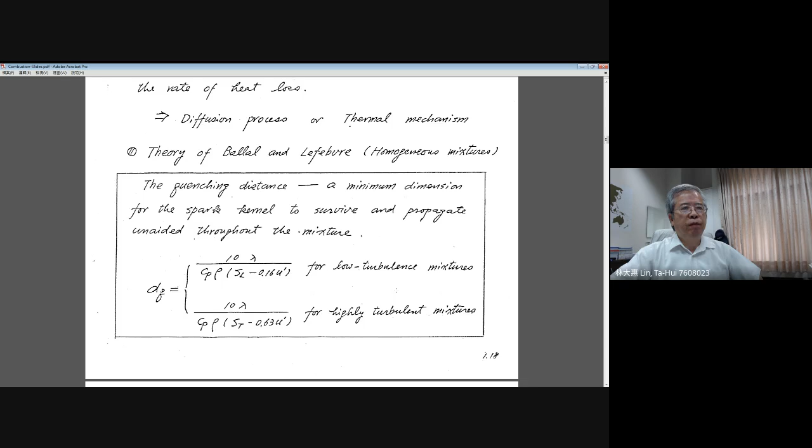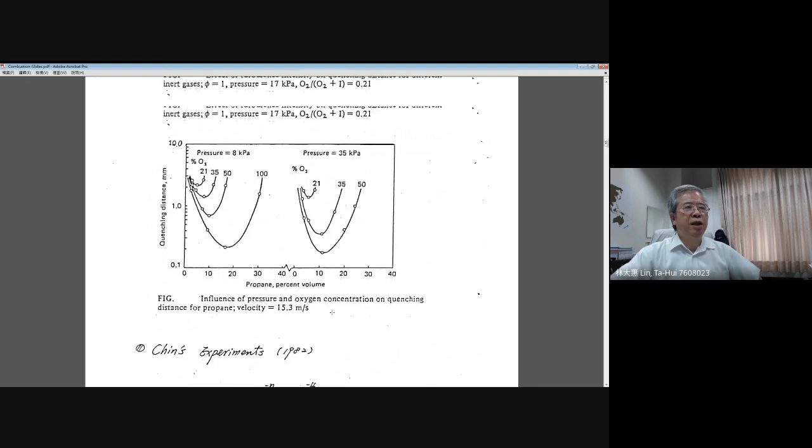Now I will give you some experimental results to emphasize the dependence of thermal diffusivity and turbulent intensity on the quenching distance for low turbulent and highly turbulent mixtures. This data came from the Chin experiment in 1982. The first figure shows quenching distance as a function of turbulent intensity on the horizontal axis, and also how it changes with different inert mixtures.

Let me explain a little. Here they give two sets of experiments, one for methane fuel and one for propane fuel on the right-hand side. Normally methane or propane mix well with air, and inside air, nitrogen is the inert. When you do the experiment with methane mixing with air, you can see the quenching distance increases with increasing turbulent intensity, for both methane and propane.

This is quite easy to understand following the previous formula. When you have larger turbulent intensity, the turbulent eddies carry a certain amount of thermal energy away from the control volume you want to ignite. With larger turbulent intensity, the quenching distance increases, meaning you need a larger fireball for successful ignition.

Next, we change the inert from nitrogen to carbon dioxide. Nitrogen and carbon dioxide have almost the same thermal conductivity, but carbon dioxide has a smaller specific heat. Nitrogen has a larger specific heat.

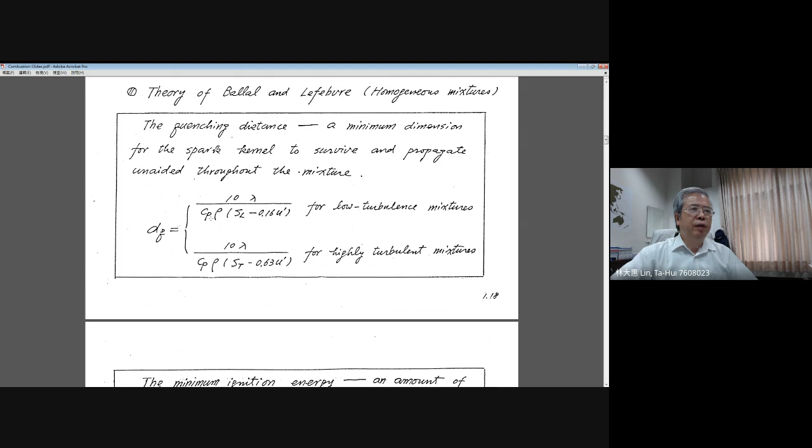Going back to the formula, specific heat exists in the denominator. When you have a smaller value, as carbon dioxide has, the quenching distance will increase, become larger. So you can see the line for carbon dioxide as inert is higher than the line for nitrogen, for both cases.

This is the first part I want to emphasize: comparing carbon dioxide and nitrogen, they have the same thermal conductivity, but nitrogen has a larger specific heat, which makes the thermal diffusivity smaller. So the quenching distance will be smaller compared with carbon dioxide as an inert.

Now, next we consider changing the inert to helium and argon, which show different variations in thermal diffusivity. Let's compare these two cases, helium and argon. Both are simple atomic gases.

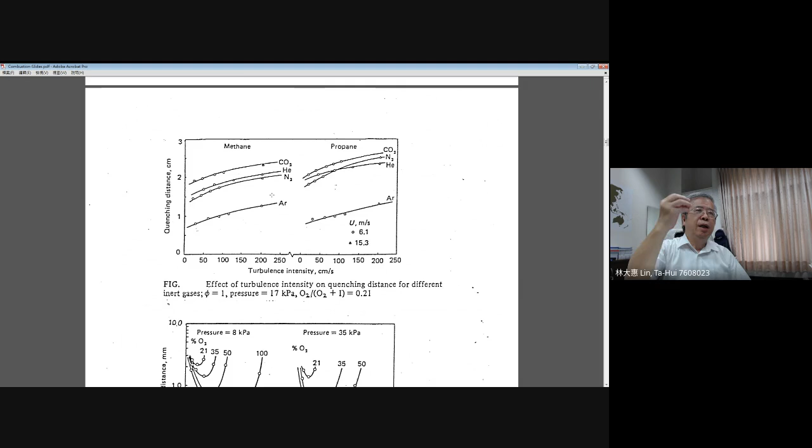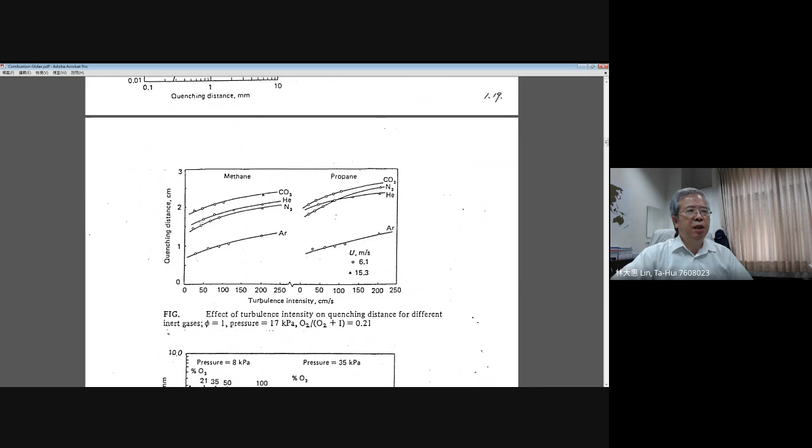They have almost the same specific heat, but the thermal conductivity for helium, because it has a small molecular weight, is larger than the thermal conductivity of argon, meaning they have higher thermal diffusivity. Lambda, the thermal conductivity, occurs in the numerator in the previous formula, as you see in this curve. So a larger thermal conductivity means you will have a larger quenching distance, and you can see the quenching distance for helium is higher than that for argon, for both cases.

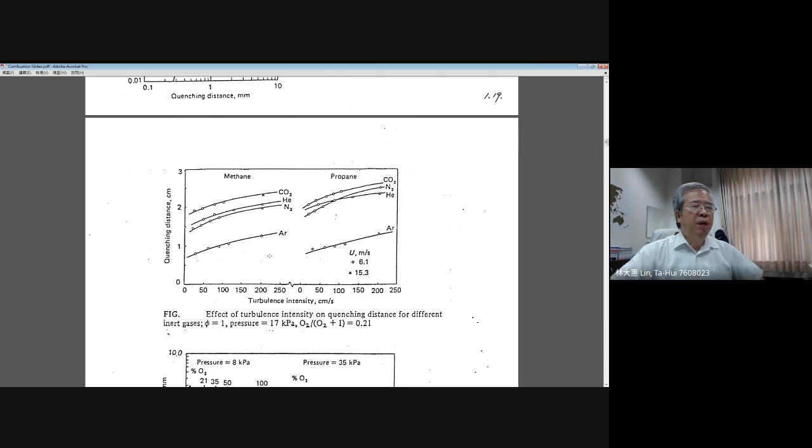Okay, and this experimental result gives you the idea about the inference coming from the thermal diffusivity and also the turbulent intensity as described by the formula for the minima dimension of spark kernel, or what we call the quenching distance.

The next figures tell you some inference coming from the mixing ratio and also the pressure. The left-hand side shows us the low pressure, 8 kPa conditions. Every curve for a different concentration of oxygen shows a U-shaped curve.

Let's look at the pure oxygen case. It shows a higher value for both sides, a higher quenching distance for the left-hand side and right-hand side. You can figure out the mixing ratio change based on the horizontal axis.

They tell you the propane percent, this is a concentration percent. For 100% oxygen, near the bottom of this shape, the mixture condition is very close to stoichiometric. In this region, they correspond very nicely, well mixed, with enough fuel and enough oxygen, easier to be ignited.

Now the quenching distance reaches a minimum value, but if you increase or decrease the percent of propane, you go through the so-called rich side or lean side. Rich side means you have extra fuel, and lean side means you have extra oxygen. For both cases, they do not have the optimal mixing condition, so the minimal ignition energy or quenching distance will be increased. This is easy to understand.

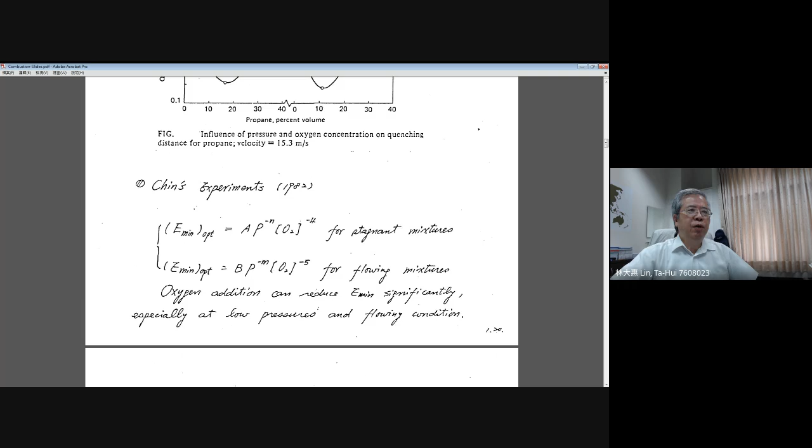They tell you the minimum ignition energy is inversely proportional to the pressure, and also inversely proportional to oxygen concentration to the power of 4 for the stagnant mixture, or to the power of 5 for the flowing mixtures. These results can be justified from the data shown in the following figures.

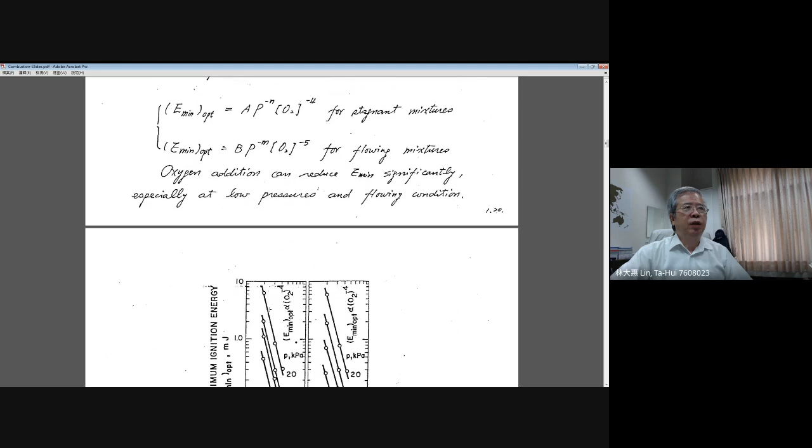This is a straight line in the log scale plot, representing that when you take the slope of this linear line, you can obtain the correlation result with oxygen concentration as shown here.

For the stagnant mixtures, the minimal ignition energy is inversely proportional to oxygen concentration to the power of 4. This whole experiment data actually represents stagnant mixtures, where the flow is stagnant without moving or flowing. For both cases, they show there is the power to the 4th.

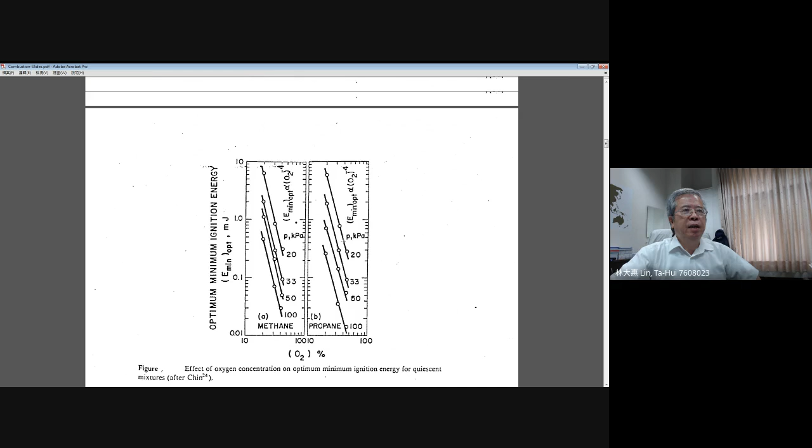Additionally, you can see the influence coming from the pressure. When you decrease the pressure, the minimal ignition energy will shift to the upper part, meaning you need more ignition energy to have the premixture be ignited. This experiment data gives you the idea to think about the relationship described in the previous formula.

For the stagnant mixtures, for the flowing mixtures, they show the same results, but the slope for the linear lines is different. The minimal ignition energy for both cases, methane and propane, for the flowing mixtures is actually inversely proportional to the order of 5. That means it is more strongly influenced by the oxygen concentration in the flowing mixtures.

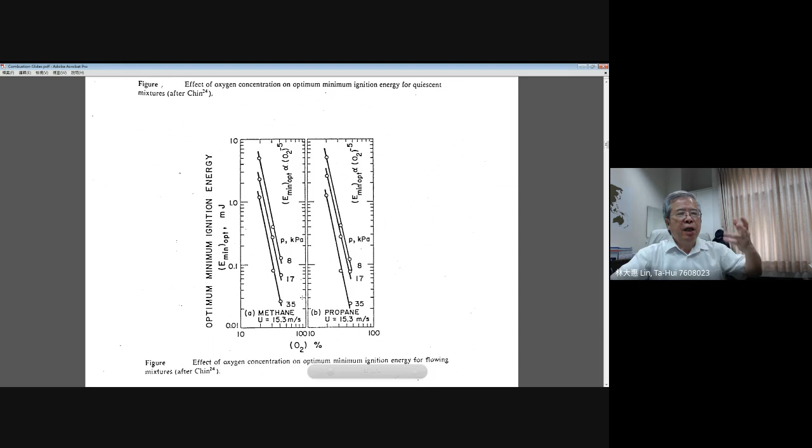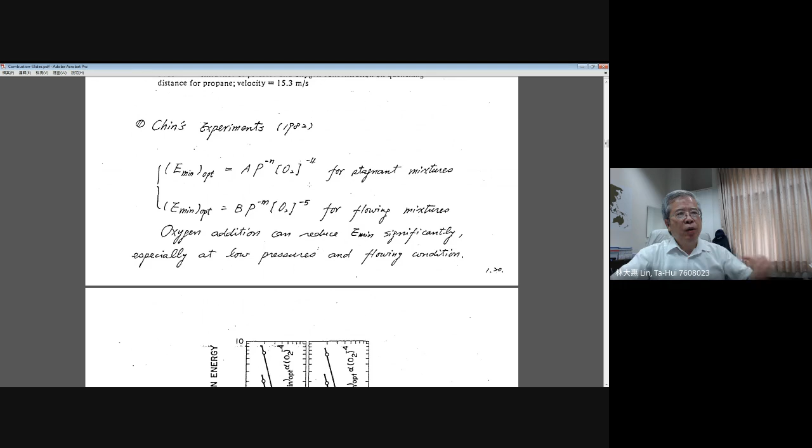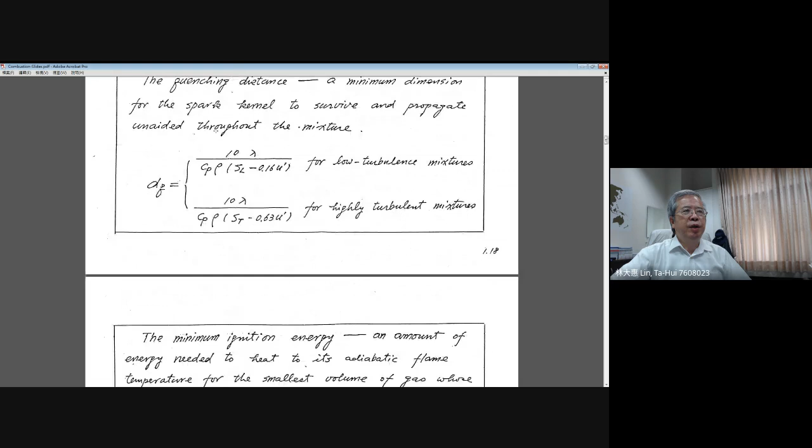Those kinds of experiments are compared and confirmed, summarized as these two correlation equations. You can refer to them, and from those experiments in the literature, you can justify that the formula derived by the ignition theory is suitable to estimate the capability of ignition of a premixture.

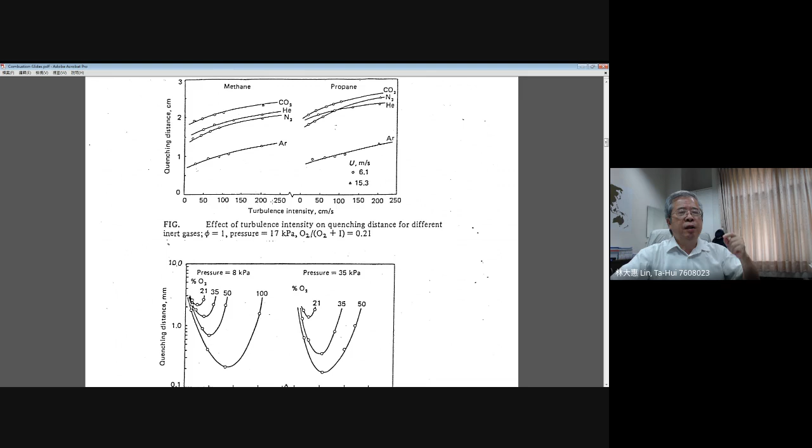Now the next step I emphasize: from the so-called S curve based on the Damkohler number, we understand there are two so-called transient states. One is ignition, which is a function of time. The other is the transient state we need to discuss, which is extinction.

Now we move to how to define the so-called extinction. Based on the definition of ignition, you need to supply enough energy and active species into your premixture, then you will start to have a chemical reaction continuously. This is basically the idea of ignition of your premixture.

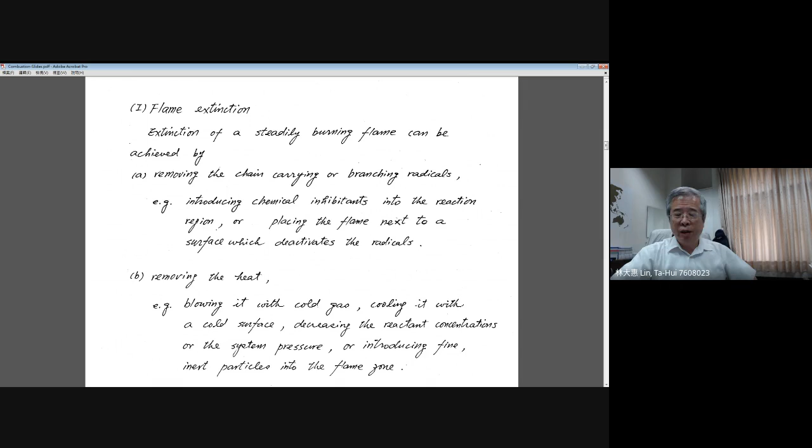Now go back to conversely thinking about flame extinction. You already have a premixed flame, and now you think about how to quench it. Simply said, if you can carry a certain amount of thermal energy out, then this chemical reaction will be turned down. This is one way.

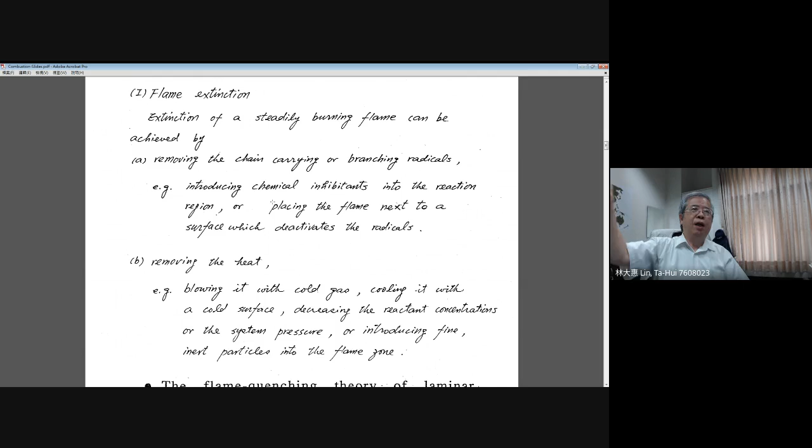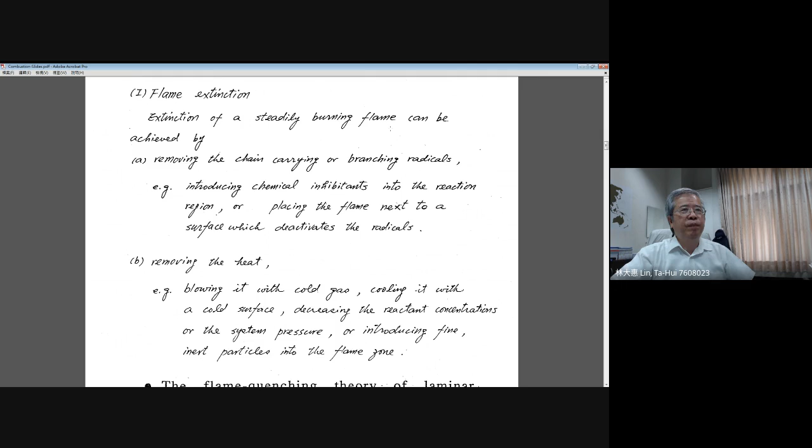Or you move away those kinds of active species, and the same thing, you will suppress the chemical reaction. This gives you the idea about achieving the extinction of a steady burning flame. There are two methods for you.

One is removing the chain carrying or branching radicals. You remove those kinds of OH or O radicals, then you cut off the chemical reaction step, and they will terminate all the chemical reaction, and the flame will extinguish. A similar way is, for example, introducing chemical inhibitants to the reaction zone, or placing the flame next to a surface which deactivates the radicals.

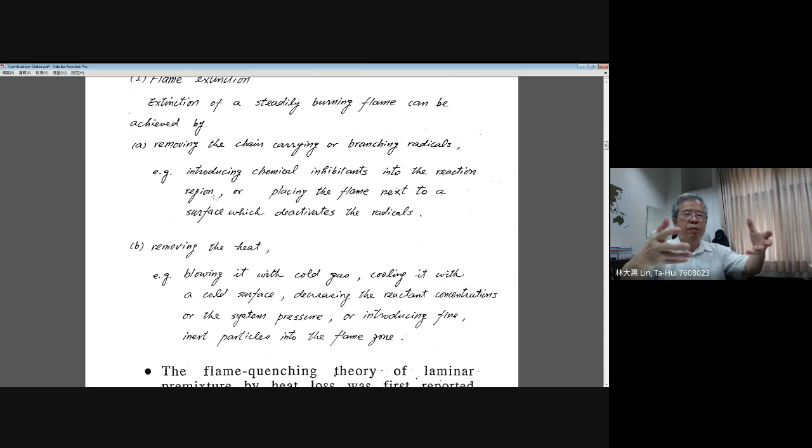Introducing chemical inhibitant to the reaction zone can simply be observed from fire extinguishment. When you have a fire and use carbon dioxide as an inhibitant, or use sand put on the fire, those kinds of sand or carbon dioxide will give you some inhibitants. They will break up or carry out the chain carrier of chain radicals, then terminate those kinds of chain reactions. Then the chemical reaction will cease, and the flame will extinguish.

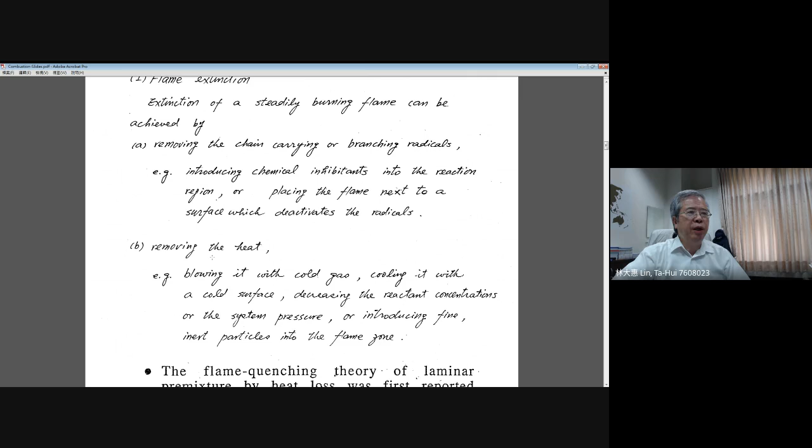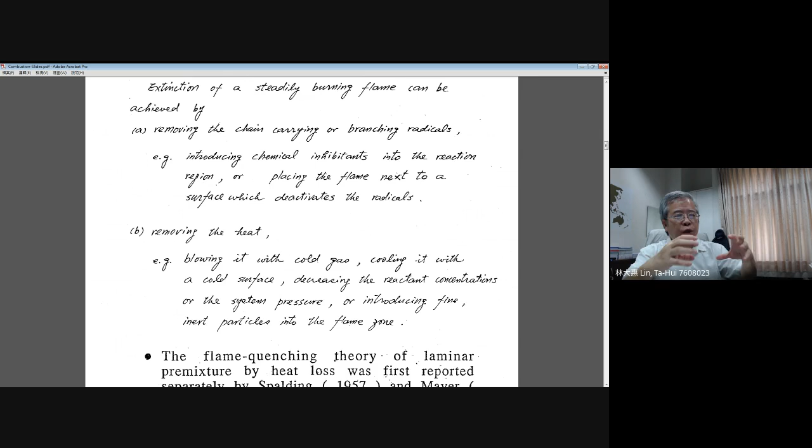The other method is removing the heat. I think the easier way is blowing it with a cold gas or a cold surface. You can even introduce fine inert particles into the flame zone. A simple way is using water spray. Usually firefighters use water to quench all the heat contained in your combustible region, then the flame will extinguish. These are typical examples of the extinction of a burning flame.

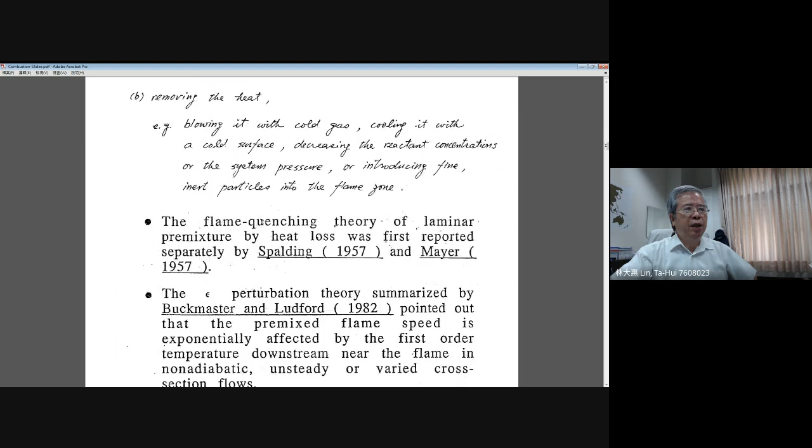There is a theory we call the flame quenching theory, of laminar premixture extinction by heat loss, reported by Spalding in 1957 and Mayer in 1957.

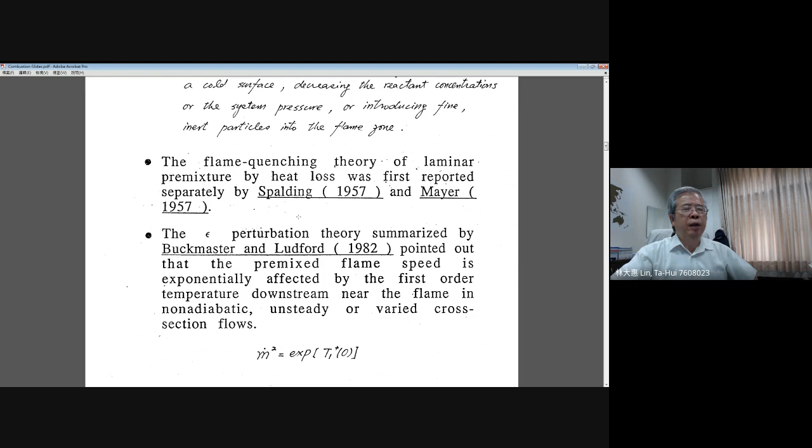Later, Buckmaster and Ludford used perturbation theory to analyze the flame quenching theory, and they get this kind of result. This is a very nice theoretical result. They tell you the burning - this is the mass flow rate, or you can see it as the flame speed - is a function, an exponential function of T1 plus 0. What is the meaning of T1 plus 0?

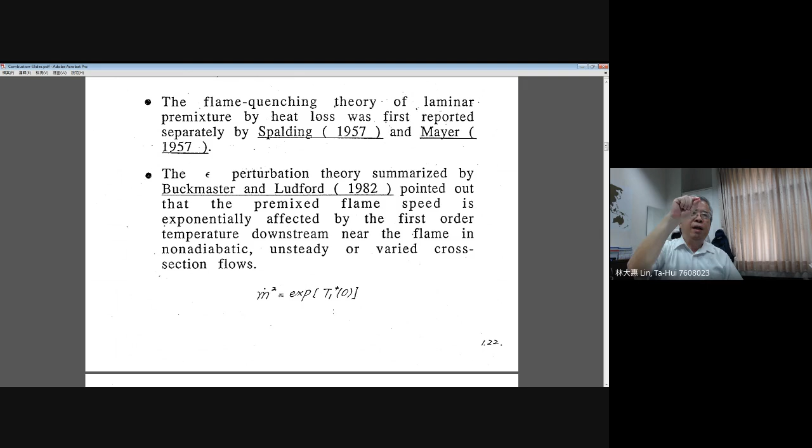Actually, this is a small temperature perturbation at the flame zone. For example, you have a flame temperature at the flame position - that is the maximum flame temperature in your flow. But now, when you apply some heat loss, the temperature will decrease because the chemical reaction is weakened. Those kinds of variation can be found by T1 plus 0. Plus means the downstream of your premixed flame, very close to the flame surface.

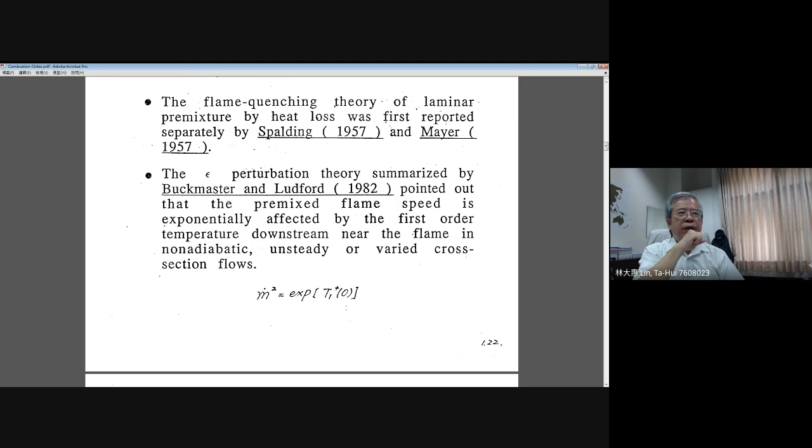This small variation, if large enough, leads to flame extinction. By applying this result, they can plot a very famous curve. We call this the so-called C-shaped extinction curve, or the double value function.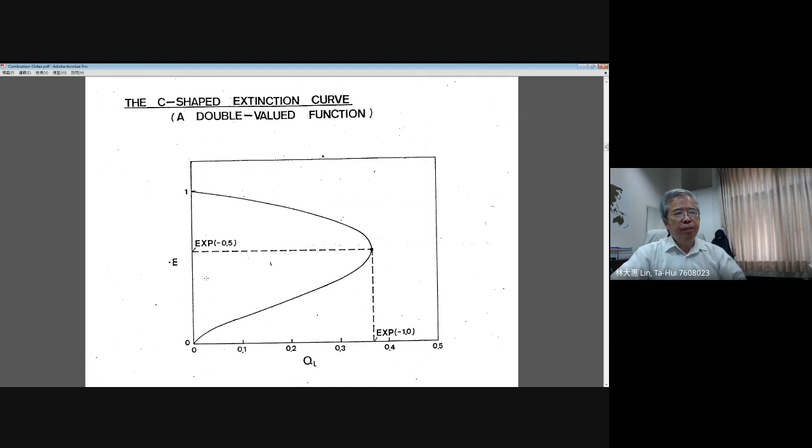How do you look at this? Now you can look at the vertical axis, m dot. This is the mass flow rate, or you can see it as the flame speed, flame propagation speed. And QL represents the heat loss. This heat loss may come from conduction loss, radiation loss, convection loss - different kinds of heat loss get involved. You have the total amount of heat loss as a quantity, shown on the horizontal axis.

They tell you for a given heat loss, you may have, for example, starting from 0 - 0 means you do not have a heat loss. Here, this is the adiabatic case. Now you have 1, because m dot is a non-dimensional quantity. M dot equal to 1 represents a propagation velocity - this is equal to 1 when you divide by the flame speed of the adiabatic case. This is stable burning.

Now you try to increase your QL, meaning you increase your heat loss. From the theory, the solution gives you this kind of C-shaped curve, inverse C-shaped curve. If you look at the upper branch, the flame speed starts from 1, equal to the adiabatic case. Because of the influence from heat loss, the flame speed will continuously decrease as you increase QL. This upper branch of the C-shaped extinction curve tells you the burning strength, the flame speed, continues to decrease as you increase the heat loss. At a certain point, if heat loss is large enough, up to here, you reach a turning point.

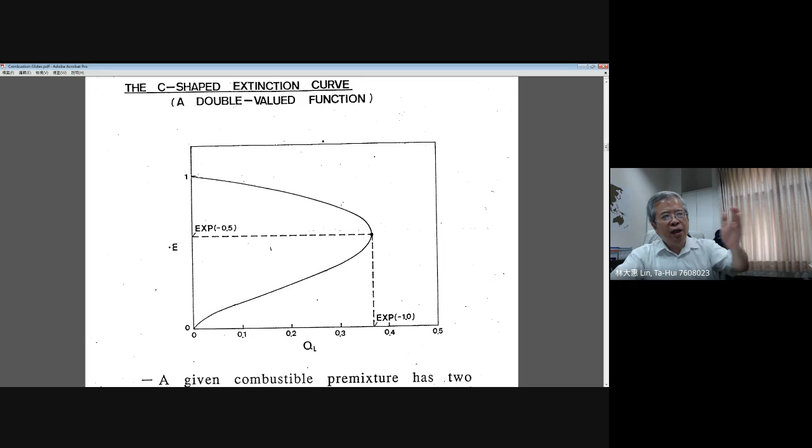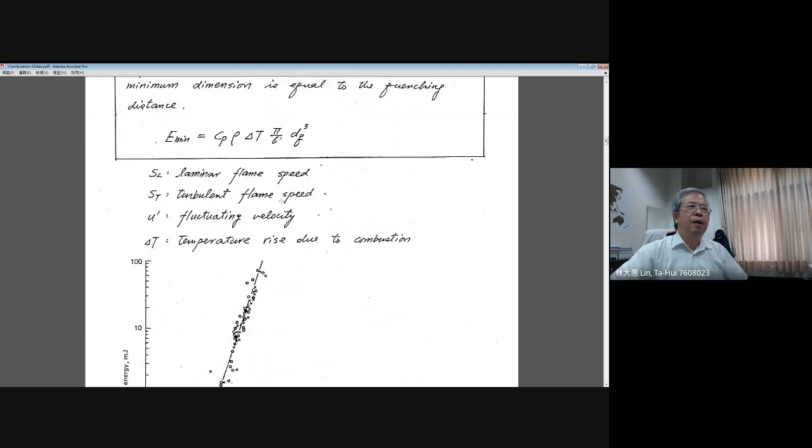When you look at this curve, I hope you remember there is a similar variation shown by the S curve. They just invert the S curve to show starting from steady burning on the left-hand side and continuous decrease to the right-hand side. When you go back to the S curve, let's move back a little bit to the previous slides - in the earlier slides, here is slide 1.16.

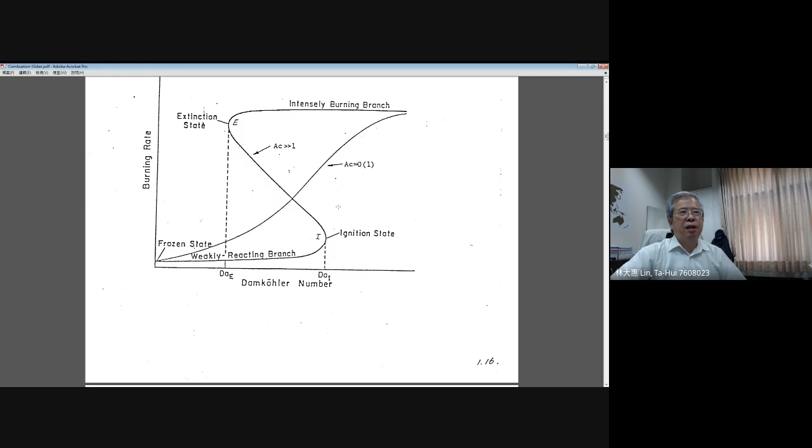Can you figure out the so-called C-shaped extinction curve? It's just the reverse of this intense burning branch. For example, here you can see this is equal to 1. If you normalize the adiabatic value to be equal to 1, then as the Damkohler number changes - if you try to change it as heat loss starting from the right-hand side and continue to increase the heat loss - the burning rate initially may not change too much, but later it will decrease to a certain value, up to here, then extinction appears. The C extinction curve is actually a reproduction of the upper branch of the Damkohler number plot. They show the same results, the same meaning of the so-called extinction behavior.

Now we go back to our C-shaped extinction curve.

In summary, these figures show the famous curves predicted by the extended theory. They tell you that a given combustible premixture has two possible flame speeds for a fixed amount of heat loss. From this plot, for example, at 0.2 QL, you may have one solution in the lower branch and the other in the upper branch.

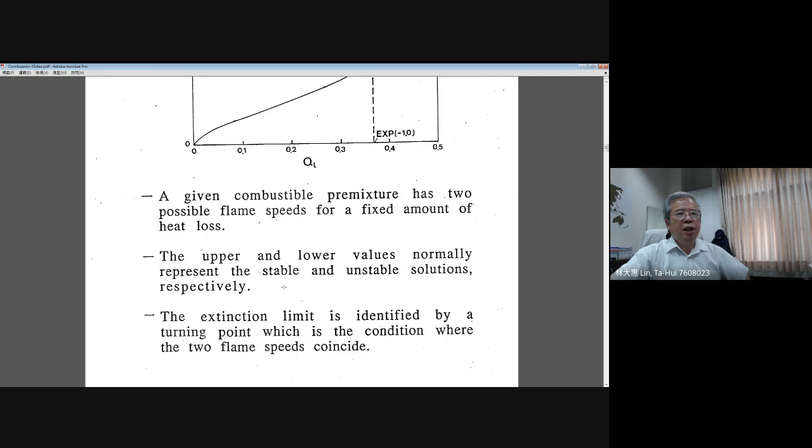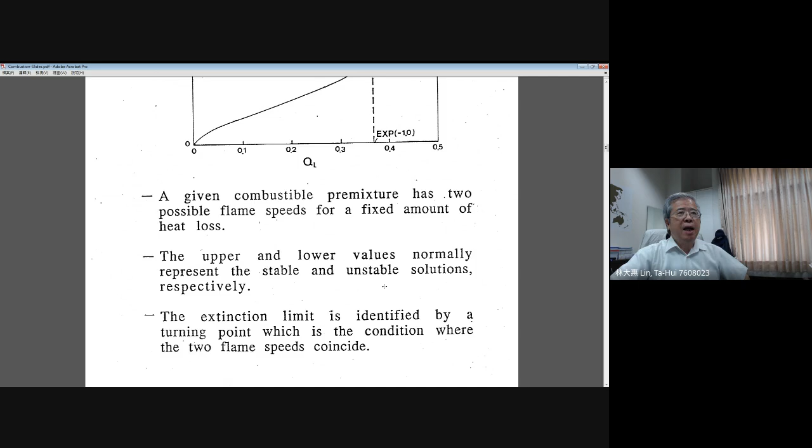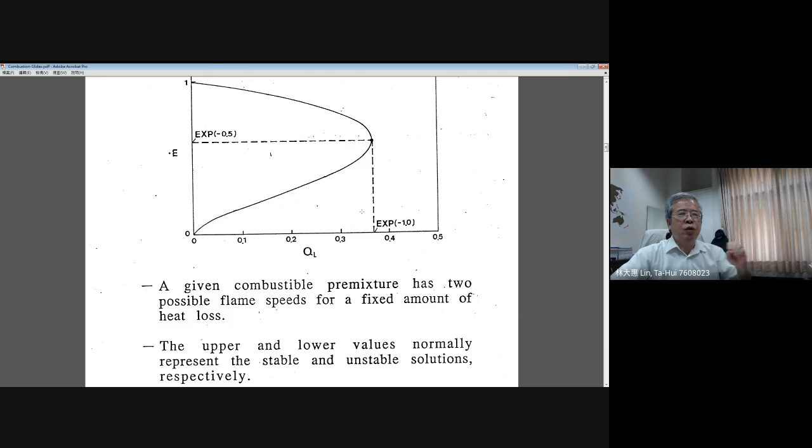However, the upper and lower values normally represent a stable and unstable solution respectively. You can have an experimental observation for the stable solution, but you may not observe the unstable solution experimentally. The extinction limit is identified at the turning point. Beyond the turning point, no solution theoretically exists, and practically, you cannot have a flame exist in your premixture—meaning the flame is completely extinguished in your given flow.

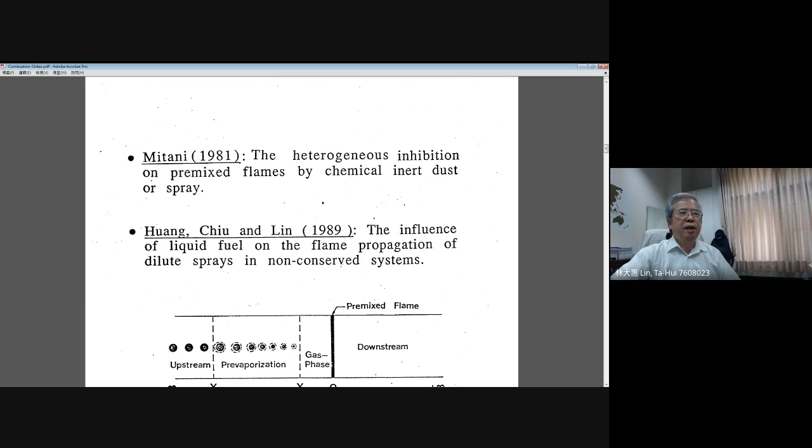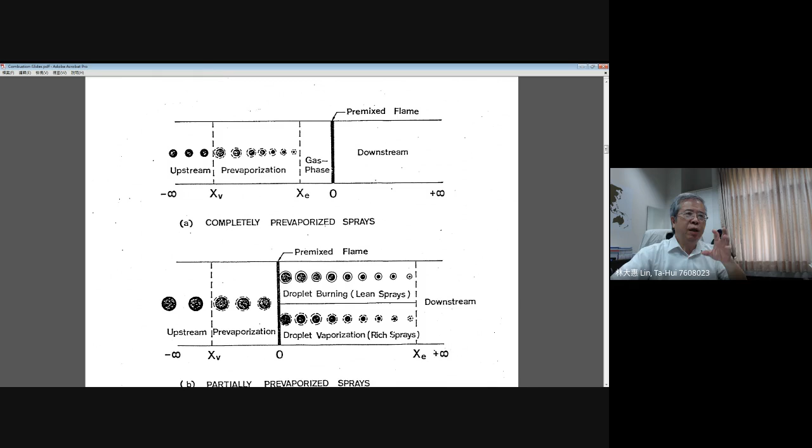I will not go through this further, but there is some theory, including my own work published in 1989, where we tried to introduce inerts, such as water, that can absorb heat into the flame zone for the one-dimensional flame. As I mentioned, if you try to make the flame extinguish, you can bring a certain amount of heat out. One way is to apply water mist or use inert particles in the combustion zone, and those inerts or water will absorb heat and produce extinction.

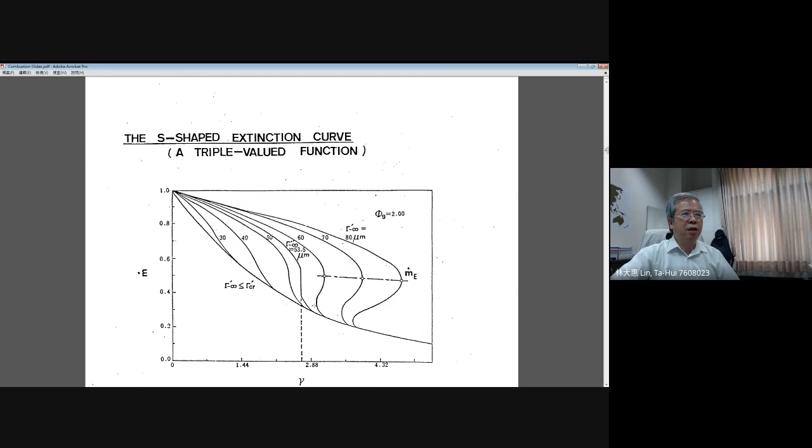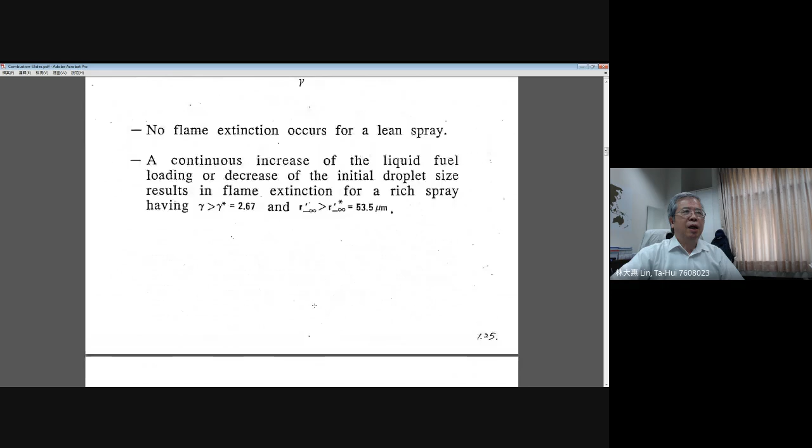Those results involve two-phase flow, and they still show a C-shaped curve, but with droplet participation, some kind of S-curve occurs, and a triple-valued function can be formed. I won't describe this in detail since we haven't covered spray characteristics. Now I've finished the introduction on extinction.

I want to emphasize the mechanism for ignition and extinction. Basically, these two—ignition and extinction—are transient states. All variation of the burning characteristics for ignition or extinction is a function of time.

For ignition, the time interval can actually be measured. But for extinction, up to now, people do not have a very definite conclusion for the extinction time. From our experiments, extinction always occurs suddenly, in a very short time—so short you cannot measure it. But for ignition, when you supply electric energy from the spark, you can measure the flame occurring in microseconds or milliseconds.

That means there is still a so-called ignition delay time. The ignition delay time means that when you supply thermal energy into your combustible mixture, it still needs a very short time to initiate the multi-step chemical reaction. Once those multi-step chemical reactions occur within that short time, ignition will continue, making the flame self-sustainable, and then it will propagate.

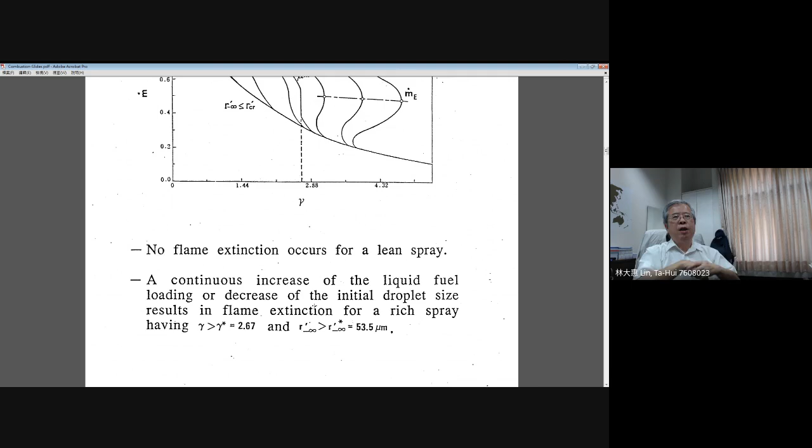But anyway, I'll give you the idea based on the Damköhler number curve: think about increasing the Damköhler number—you can make the premixture ignite. As you reduce the Damköhler number, the propagating flame will be weakened continuously, leading to extinction. These abrupt changes at the turning point on the S-curve or C-shaped curve represent the ignition and extinction behavior.